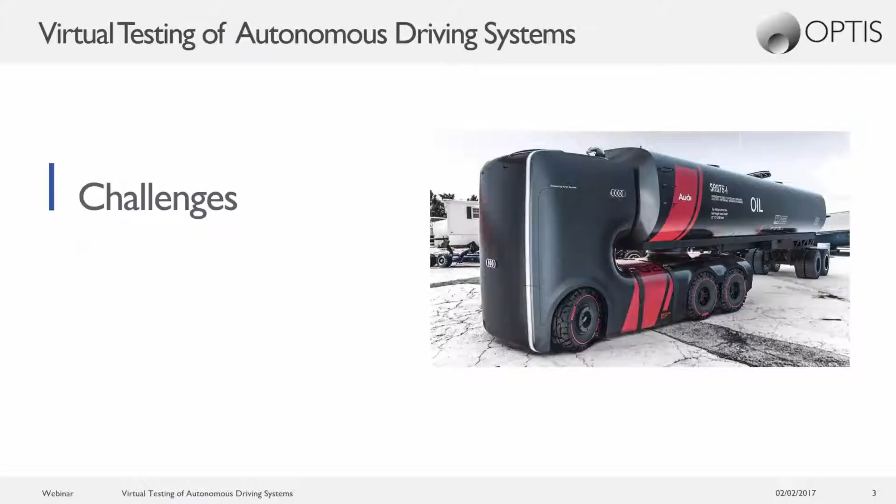The autonomous driving will of course bring a revolution. First, it will bring safety. Avoid the drowsiness, the drunk driving incidents that should decrease because there is no designated driver needed when the car drives by itself. Comfort, of course, you don't have to be stressed by the circulation. The car is dealing with all of that.

More important, the time. When a computer takes over the driving responsibilities, the driver can use that time to do other things, like catch up on reading, for example. Also, self-driving cars in large numbers participate in a behavior known as platooning, which would significantly improve traffic conditions and congestion. Sensors also in autonomous cars allow vehicles to ride closer together, therefore allowing more cars on the road with actually less traffic.

And also very important, mobility for everyone. Disabled individuals who have to rely on public transportation or assistance from others to get around could reap the benefits of self-driving cars with new freedom and enhanced mobility. Even dogs can have their own mobility.

What's new regarding automotive? If we consider the driver, the environment, and the vehicle first, what is new is the new HMI. Improve the interaction of the driver with the environment with augmented reality head-up displays, for example. Change the interaction between driver and vehicle to deal with handover from driver driving to autonomous driving. Entertain or inform the driver when he's not driving.

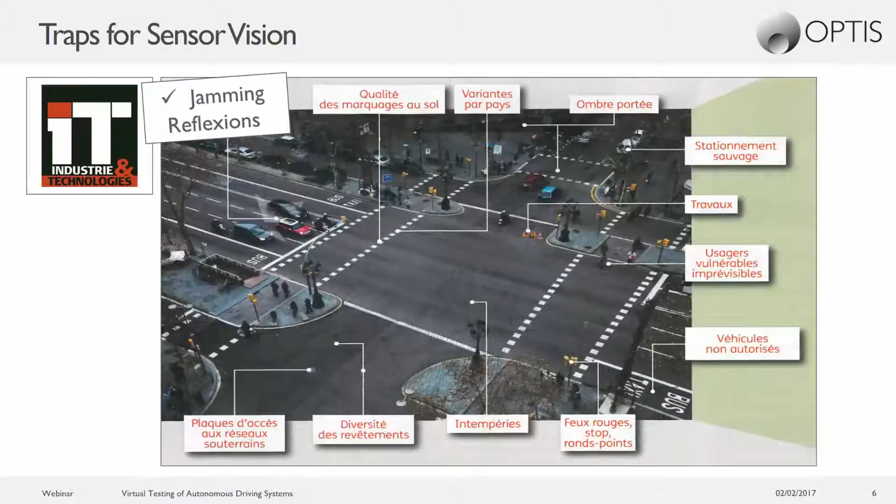Okay, what are the challenges of sensor vision? The French industry and technology magazines report the different traps for sensor vision. First, the different reflections from the buildings, the other vehicles, the markings that are different depending on the states, on the countries, markings that differ by their quality. Shadows, here due to a traffic light pole, for example.

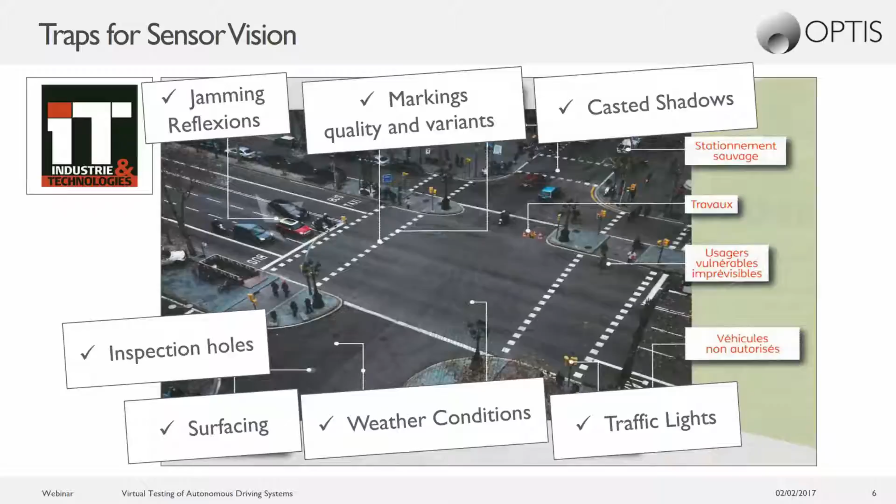Inspection holes with their slabs of metal, surfacing of the asphalt. Weather conditions, traffic lights different depending on the countries. Traffic lights with lighting that are different in color and intensity. The major traps are linked to light, weather, and materials.

Today, it is estimated the big challenge regarding all these traps is to replay these situations. Today, it is estimated that for one ADAS, the distance to validate one ADAS is around 1 million miles, for a cost of $5 per mile, and a time of 6 to 12 months.

Yes, that's clearly a high challenge to reach such kind of virtual testing and validation. What is clear is simulation and virtual testing is key to achieve such kind of validations. And part of this virtual testing, the sensors part is also a key challenge to achieve.

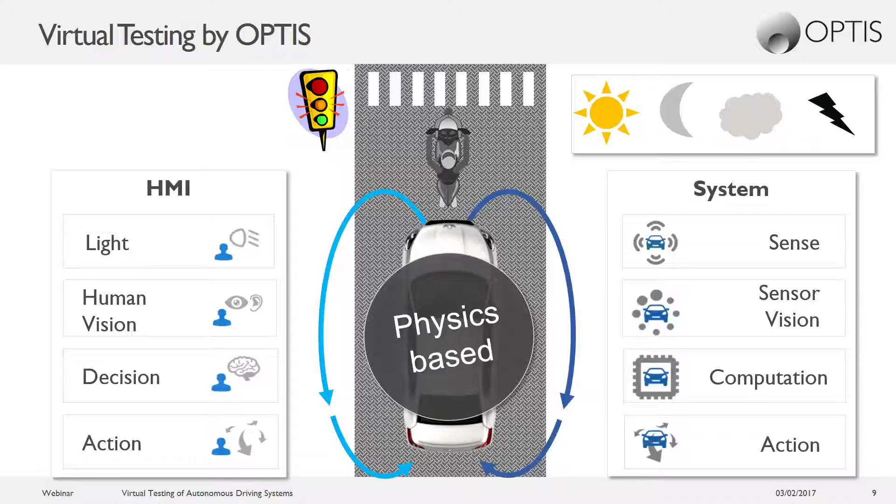So the two workflows are able to achieve the system and the embedded intelligent systems, and also the HMI, which are all based on physics-based modeling. And for the sensors, in particular the optical sensors, it's mandatory to get precise and accurate models during the simulation process. And also for the environment, it's also mandatory, and the OPTIS solution provides the lighting conditions perfectly reproduced, as well as the other vehicles and pedestrians, in order to put the simulation in the context.

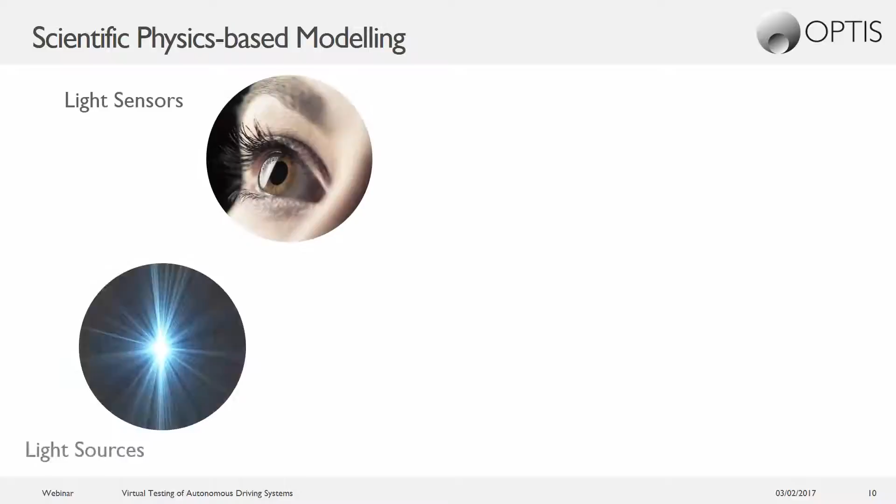So to address this challenge, the proposal is physics-based modeling, and physically correct content definition is key, from a fully modeled light source, the path, and through an optical characterization of the materials, the surfaces, and the volumes, up to using the sensors as well as the human eye and digital cameras as a receiver. And physics-based simulation is the only way to guarantee the predictivity and the realism of the simulation.

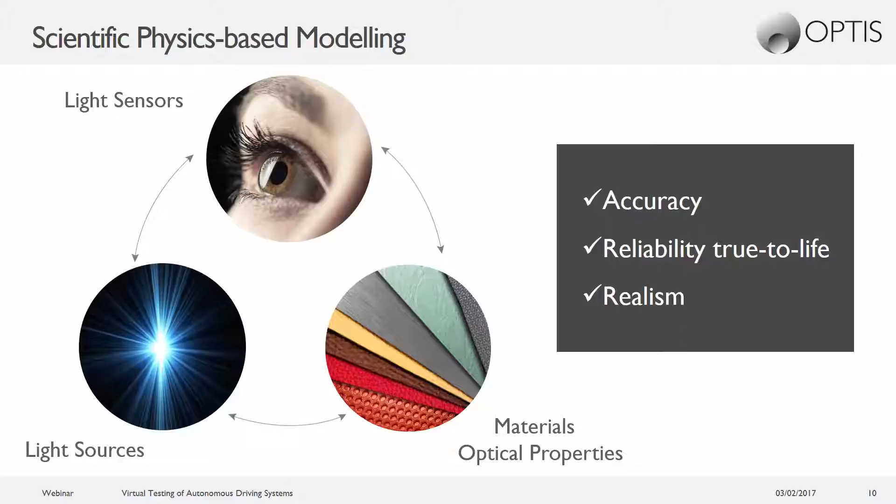The OPTIS simulation platform is CAD integrated, and it is also connected to the system development tools. So it's a cooperative platform, and this solution fits all the automotive industry challenges. Now let's start with in-vehicle modelization to illustrate that vision.

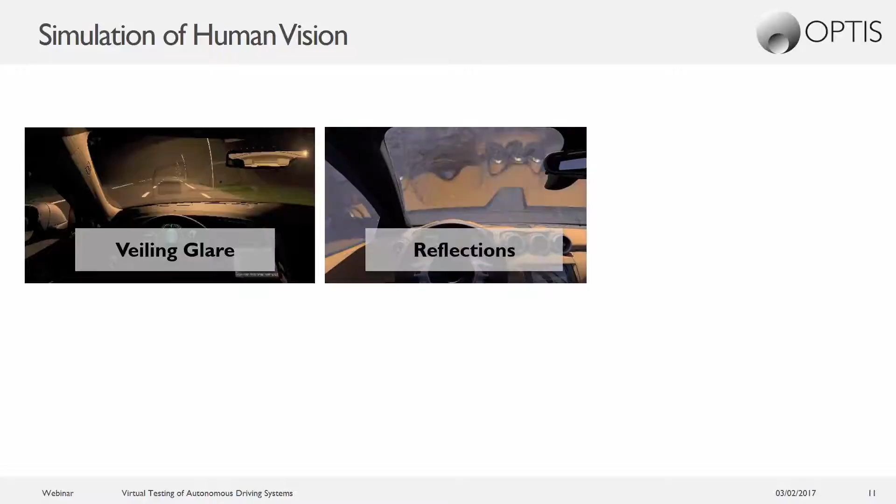And before going into the detail of the sensor, keep in mind that the human factors, and especially the human vision, represent 85% of our perception. And light simulation is a major topic to solve the visual challenges of the HMI, as for example the veiling glare, but also all reflections in the car, as well as the screen washout on the HMI, and legibility and readability, which are key to assess the HMI in terms of visual perception and human ergonomy.

Now let's go outside of the car, and one of the key points is to handle the driver vision well, and in that point lighting is also very important. So the challenge of new intelligent lighting systems, which are the new concept of ADAS headlamps, ADAS lighting, which are increasing a lot the driver vision by night. Such kind of ADAS are highly complex.

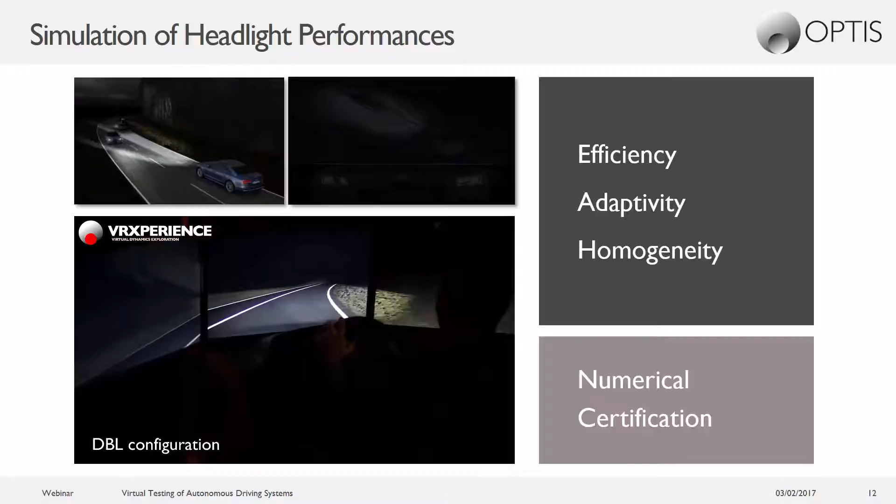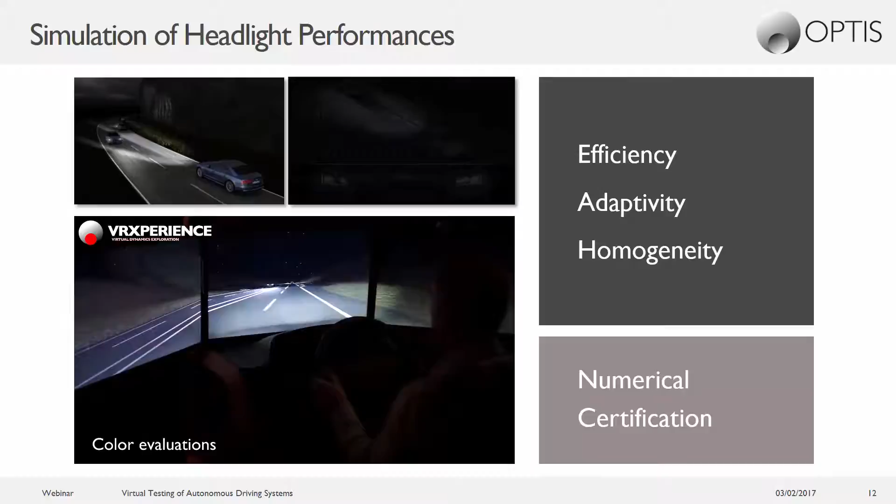It's a link between the lightings, hundreds of LEDs, the ECU, and the camera systems into an automatic system, which are complex to set up, to test, and to validate. So the OPTIS solution basically looks like a driving sim, but in fact it's a complete virtual test bench connecting the system simulation with the lighting simulation, and this is what you have in the video.

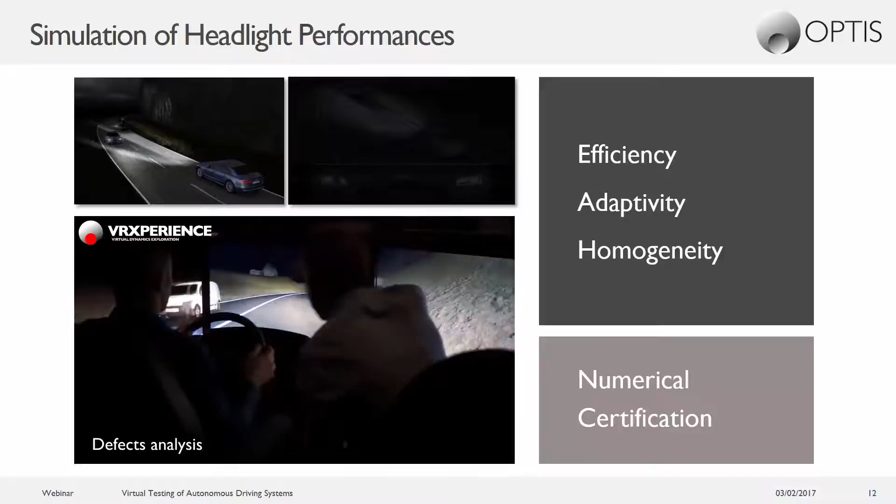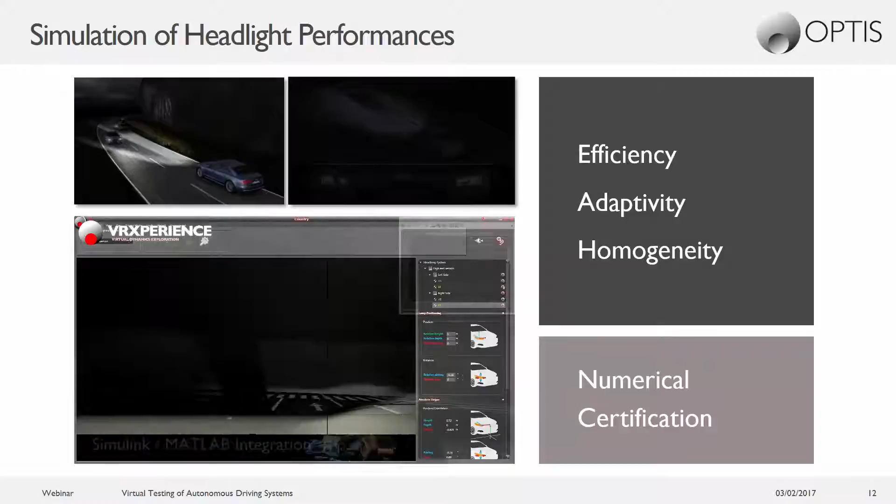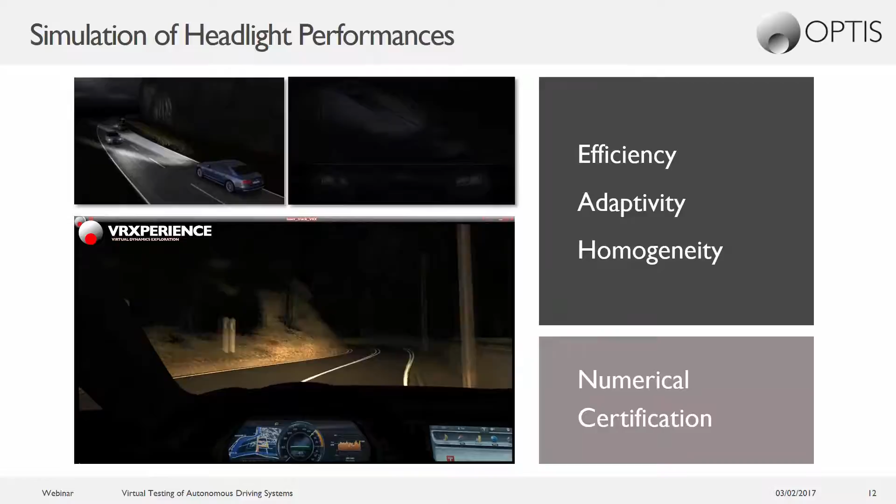And of course, such kind of application is now fully integrated into the automotive process, and it's on the way to reach the numerical certification of the intelligent lighting system. And of course, if we are going further to the camera, it's the same approach. In fact, the camera is stimulated by light, and a lighting simulation is mandatory to simulate very accurately camera sensors. And on this video you can basically see how important simulation is on a camera.

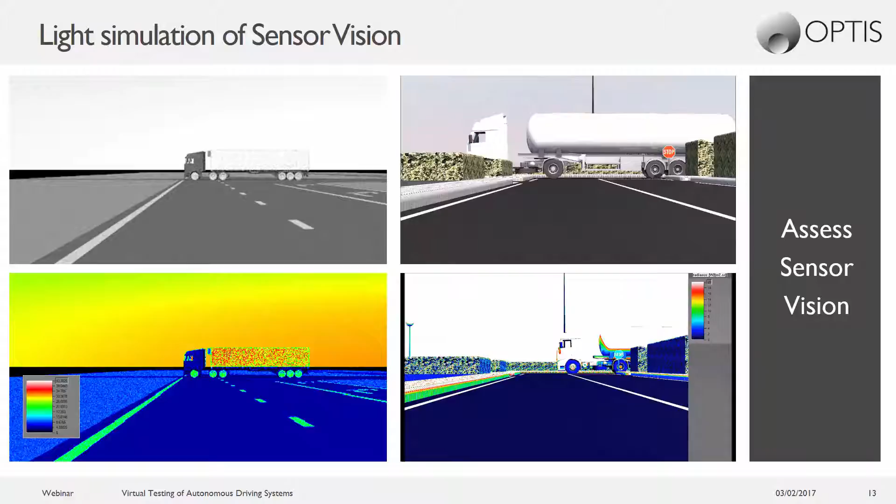For example, you can clearly see that the sky is at the same level of luminance compared to the trailer. And it's only because you have the simulation and you have the luminance that you can precisely identify such kind of issue. So again, the challenge is to master the camera using the OPTIS simulation platform.

Now let's go on to customer use cases. So one for the camera and the second one on the LiDAR.

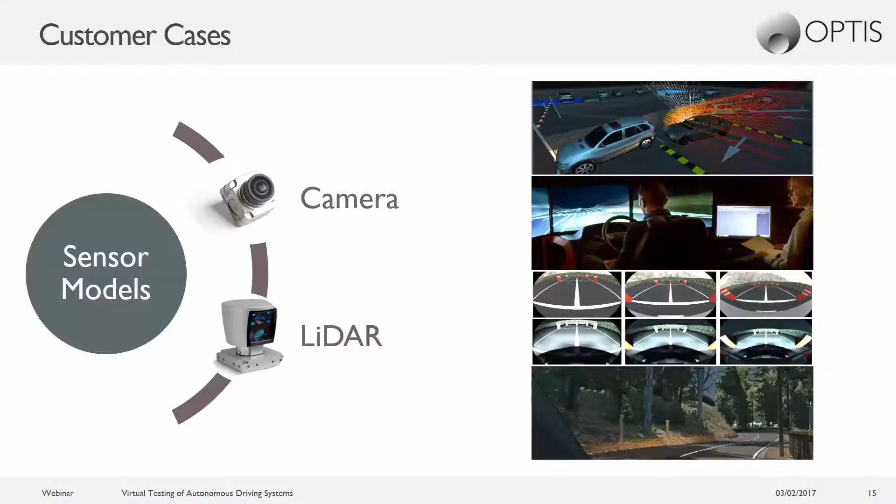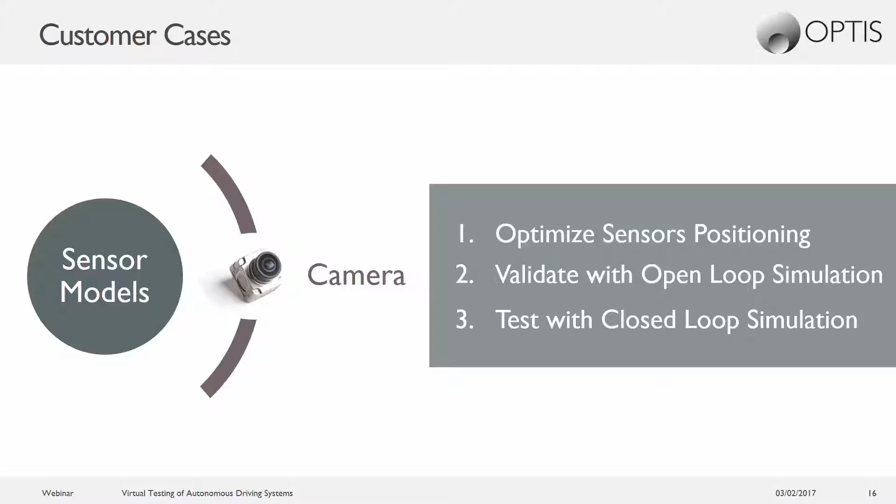So basically for each use case we have the same process. Behind the OPTIS solutions platform you have a process for how to implement and how to use the sensor simulation. The first step is to optimize the sensor positioning. The second step is to test and validate the sensor positioning and vision using open loop simulation. And the third stage is to test and validate your ADAS system in a closed loop simulation with your camera model. So let's go into more detail now.

So start with the CAD geometry. You are in your CAD platform, you define your geometry for the car as well as for the environment. The objective of that part is to identify your geometry environment in terms of cars, shape, and of course in terms of road scene and other objects that can be easily added as a target, as a reference or as a blocking object.

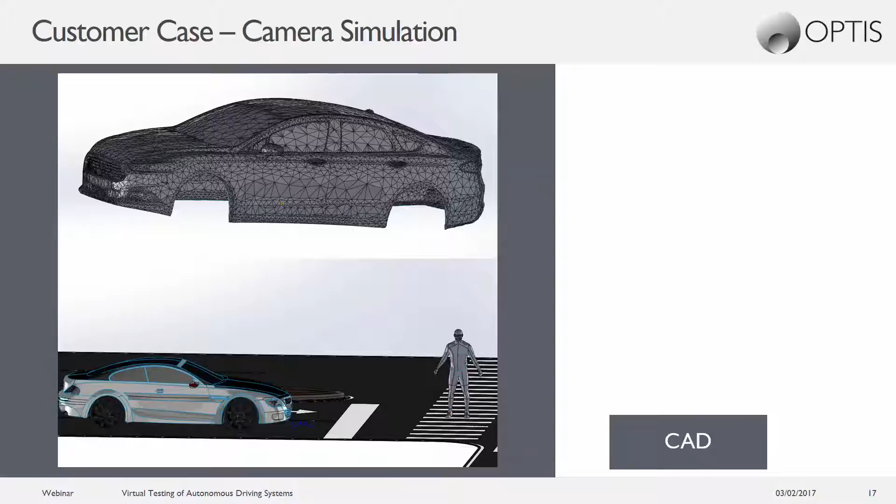Second step is to set up the materials and the optical properties of your geometry in the CAD model. You have to define the optical properties for the road environment, for the car, and also for the target. For example, in a Euro NCAP AEB test, it's important to have the dummy with the correct optical properties of the clothes, and these are also available on the OPTIS library, available through OPTIS software. So it's possible to get these materials from the library, or for any new kind of material it's possible to measure the material with the OPTIS devices.

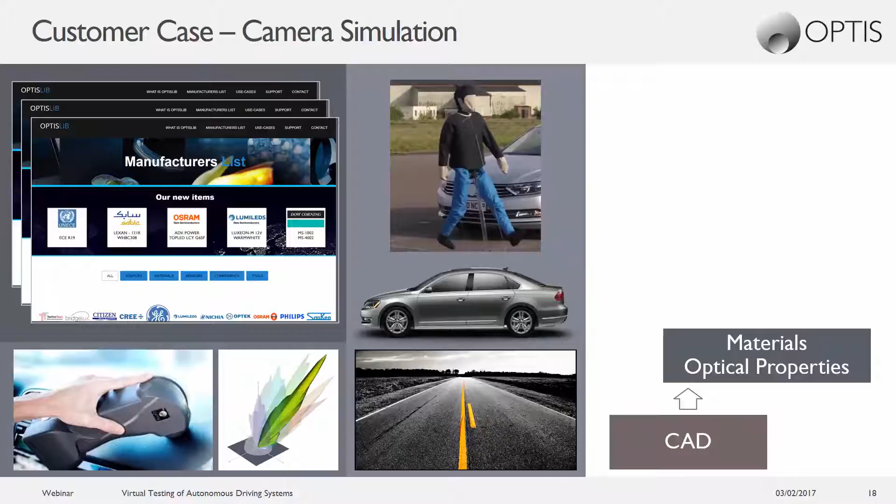Then it's important to define the camera model and to define it precisely. It's possible to define the characteristics of the camera in terms of field of view, image size and pixels, lens distortions, lens transmittance, imager sensitivity, white balance, gamma corrections, and also more advanced optical properties that take all spectral information into account. Using the camera locations provided, it's important to precisely position the cameras on the car, or in that case on the roof of the vehicle.

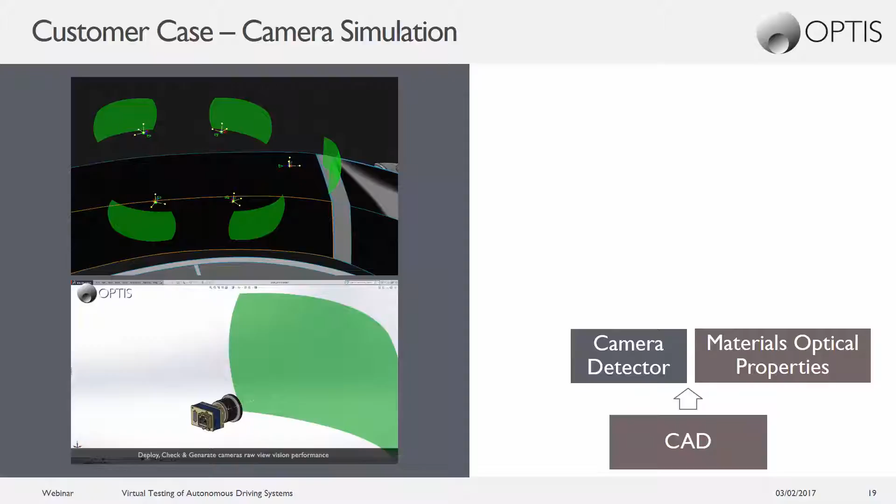After setting the camera locations, the simulation environment is ready for evaluation, and it's possible to generate a grid of pixels in order to evaluate the performance or vision of each of your cameras. In addition to the initial field of view analysis, the projected pixel grid is also helpful to check things like the camera overlap, for example. At this stage, it's also easy to quickly check the influence of mechanical tolerance and variations in the camera vision performance.

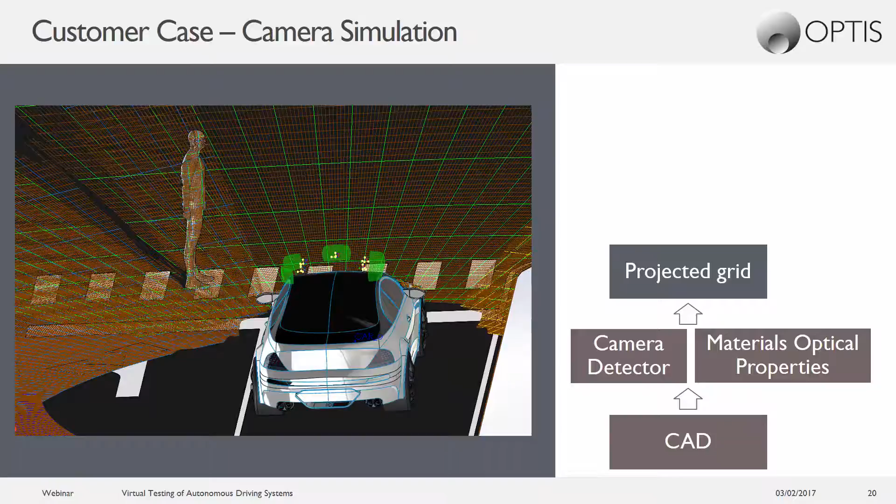At this stage, it's also possible to take into consideration the light sources. For instance, here we consider the sun positioning relative to the car, and the driving condition with road objects, pedestrians, cars, which can be considered as targets or view blockers, but also the light conditions, by daytime, but even by nighttime with street lights. Headlamps can be set up to define the context of the simulation.

So from these various situation setups, image generation enables you to check the vision performance, the detection or the basic detection, in order to evaluate the influence of various parameters. It can be considered as preliminary testing prior to more intensive testing. That's what we are calling offline simulation or open loop simulation.

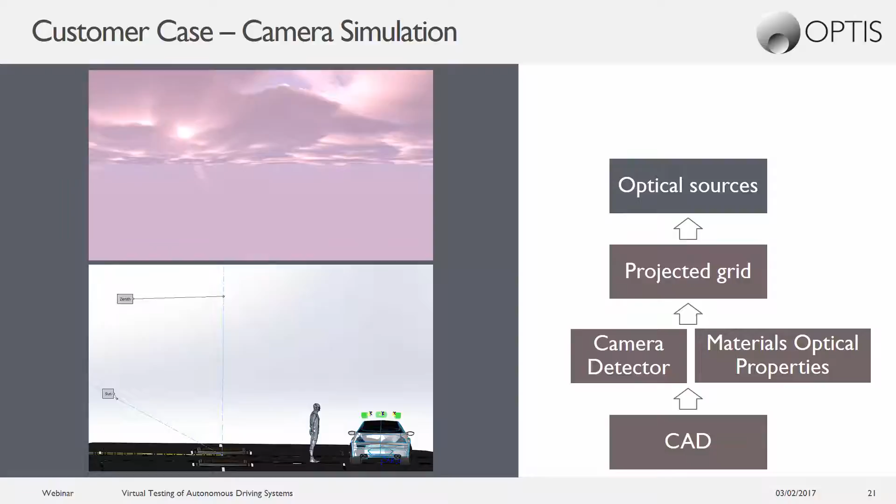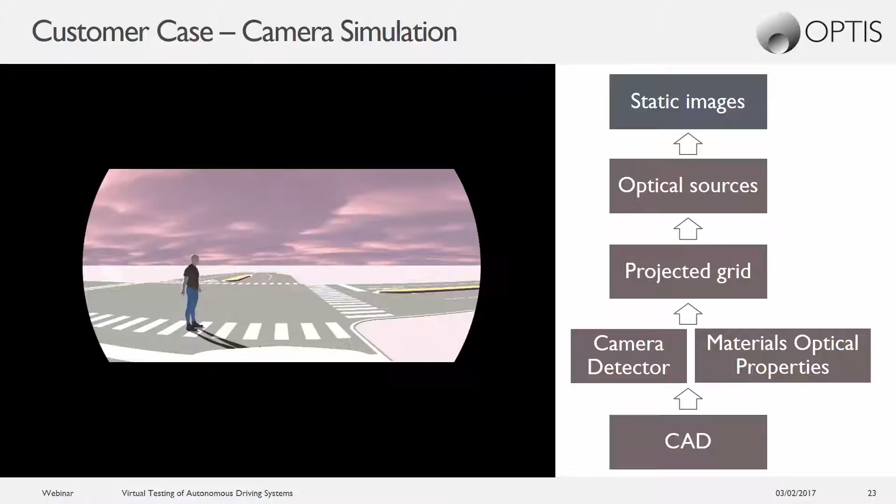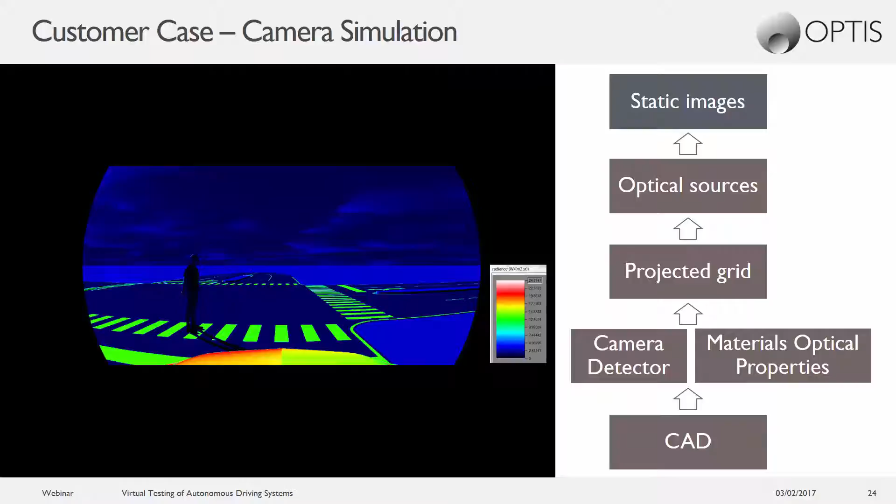And then it's possible to go one by one and evaluate each camera, generate the raw data of the camera directly, and also, because behind this image we have the simulation, it's also possible to generate the radiance and the luminance map of the camera vision, which makes that tool a complete lab to really evaluate the content of the camera simulation. Another example based on a video.

So now we have defined and worked on the camera evaluation and vision performance, considering the car body. It's also important now to bring that model and all parameters into a context of system development. In terms of closed loop simulation, that means bringing a more accurate environment with vehicle dynamics, with ADAS and self-driving car

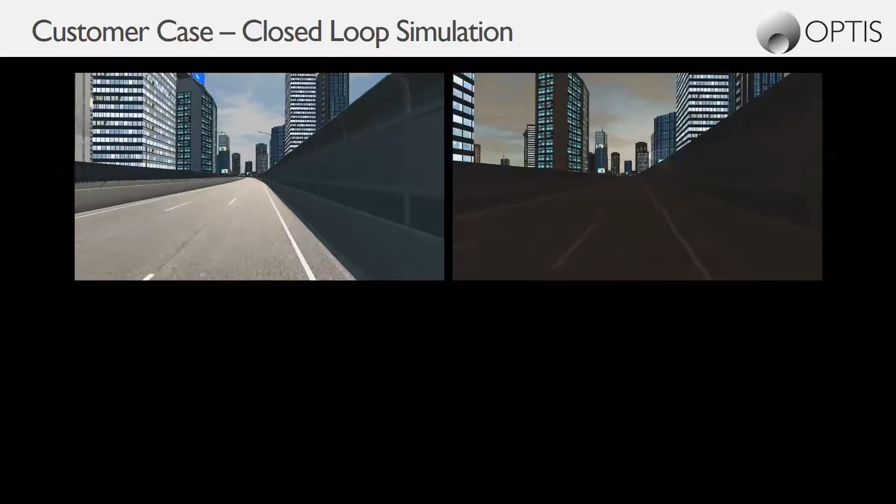software, with the accurate model, and then running simulations again and again with various parameters and various contexts, with traffic, pedestrians. And here we have 2 examples: on the left at 12 p.m. and on the right at sunset. So it's 2 contexts, 2 variables on the same scenario.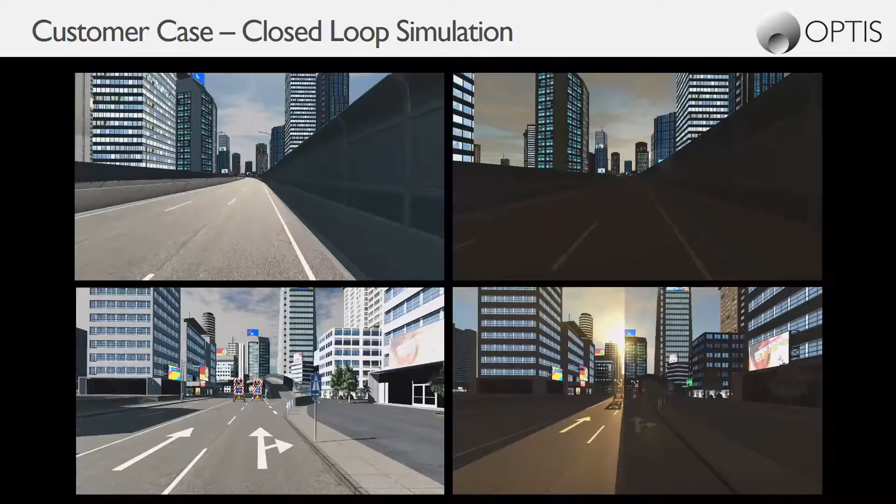So another case is, now let's talk about the LiDAR. So LiDAR is an optical sensor, so same approach, same process. At first optimization of sensor positioning, then validation through open loop simulation, and then bring the model into a closed loop simulation for system development.

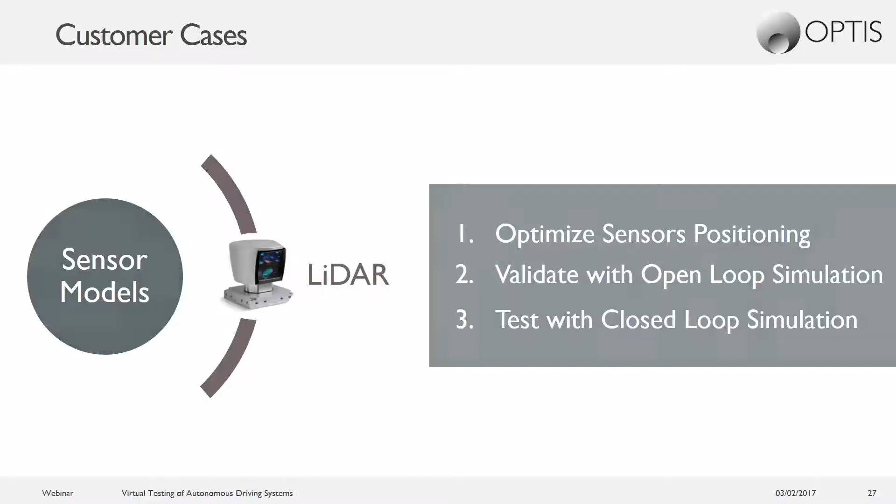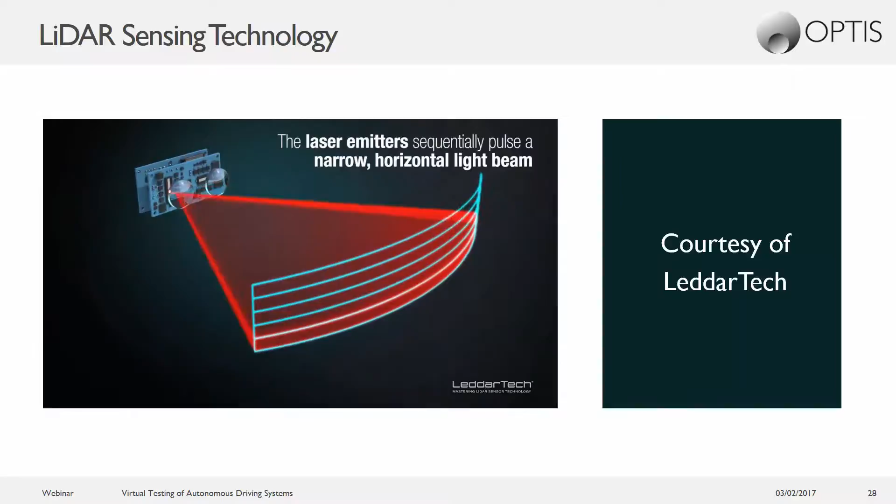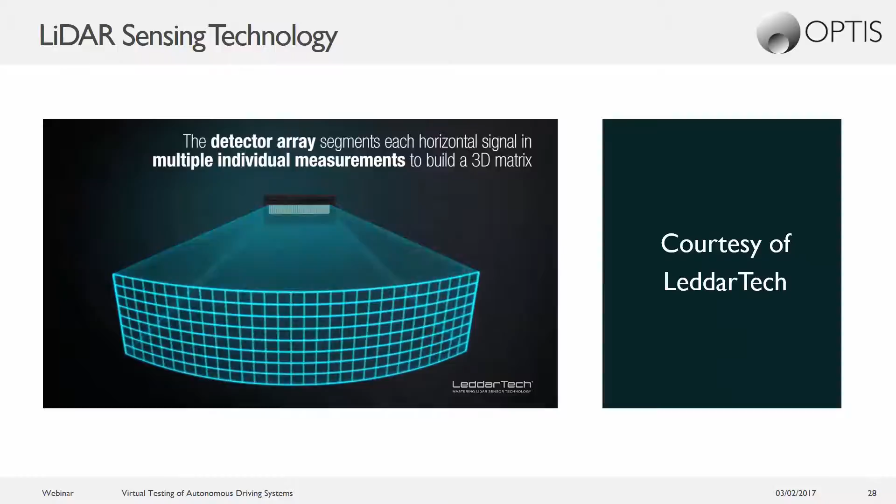The LiDAR technology now is getting more and more accurate and more accessible in terms of price for the automotive industry. So it's now a clear technology for the automotive market. And the LiDAR is like a camera with a beamer. So you have a beamer in the laser bandwidth and a camera with a certain resolution to capture the distance and the object.

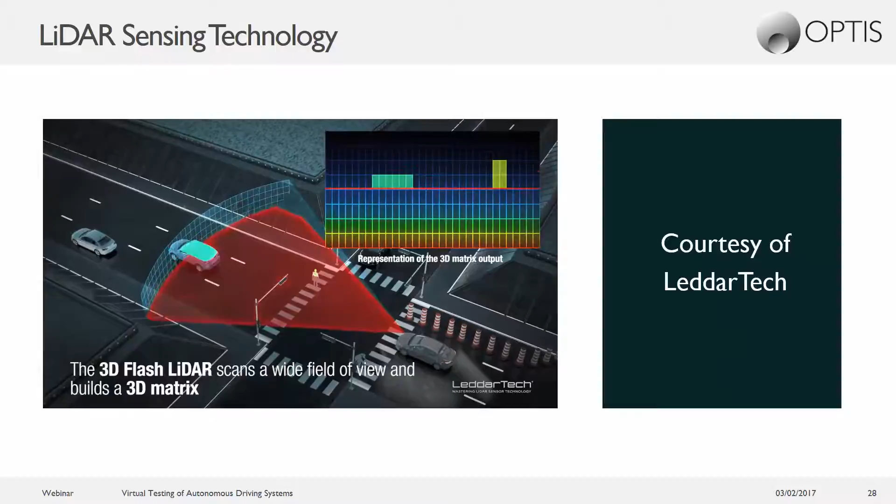So thank you to LeddarTech for this short introduction and showing how the LiDAR technology will be tomorrow one of the key sensors of the autonomous driving cars.

So same as for a camera, first step is to come into OPTIS solution software, define the LiDAR and the sensor characteristics, define the car geometry, define the target, and then evaluate the vision performance of the LiDAR according to the positioning on the car body.

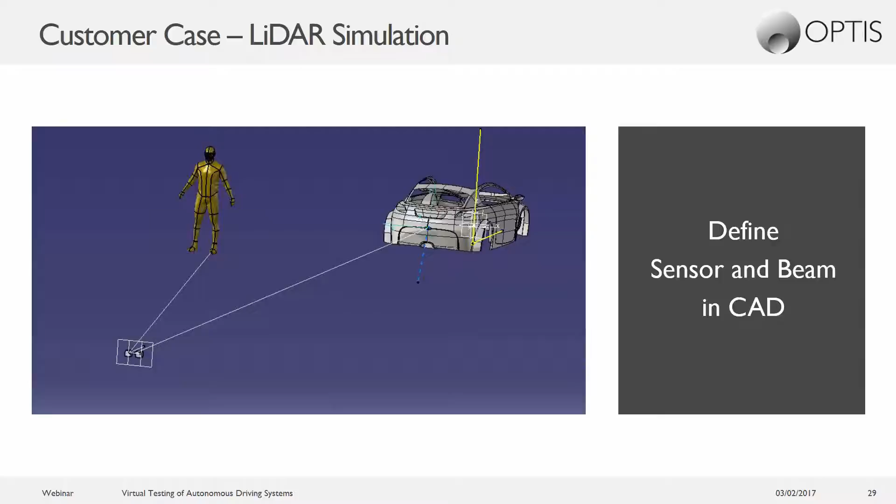And at second step, generate the LiDAR vision, in order to well identify the influence of the positioning of the LiDAR or the characteristics of the LiDAR, how it influences the sensor vision. So that can be done directly into the CAD.

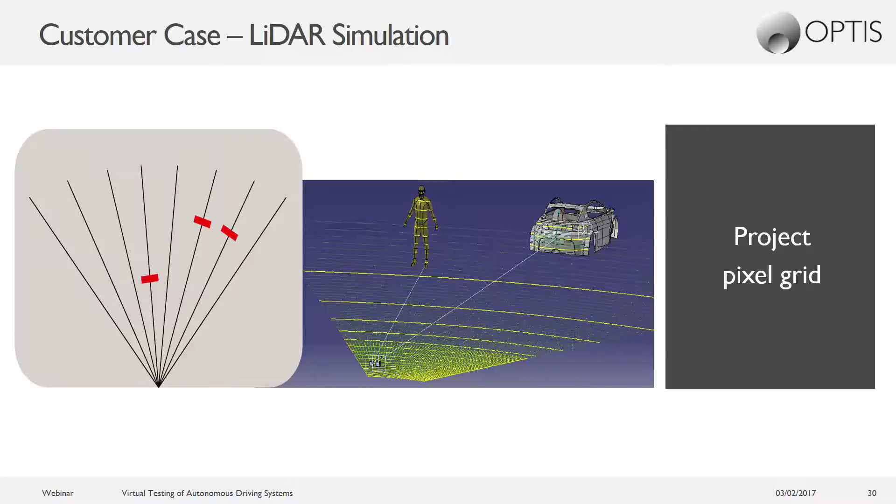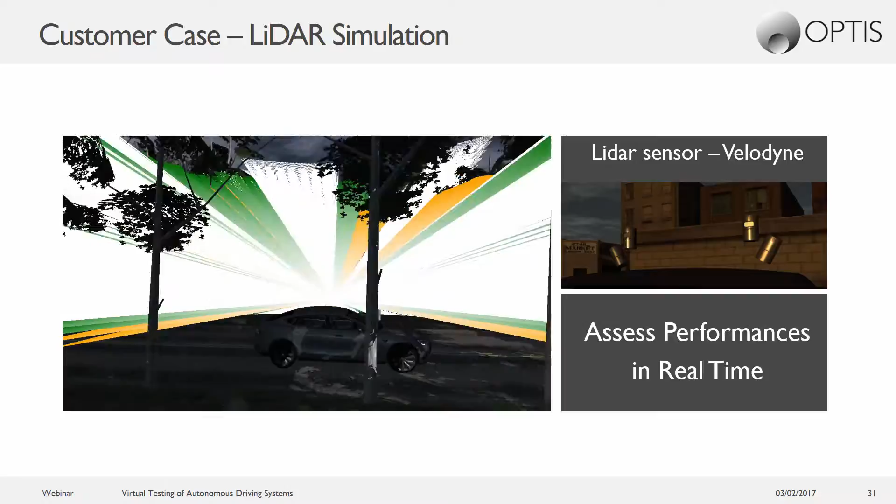So as a summary, when we are talking about virtual testing, OPTIS provides an ADAS simulation platform that includes physics-based sensor models as a solution to support the major automotive players in the challenge of AD. So technically, it's first a product called SPEOS DVS, which is CAD integrated with the objective to quickly and efficiently evaluate and validate the vision performance of your sensors, and then to generate open loop simulation, very accurate lighting simulation and sensor simulation.

And at second stage, it's possible to link these sensor models into VRX, VRX AD, which is integrated to the system development with the objective to test and validate the sensors with the systems of the self-driving car. So it's well integrated into MIL, SIL and HIL closed loop simulation for testing and validating the system part of the vehicle.